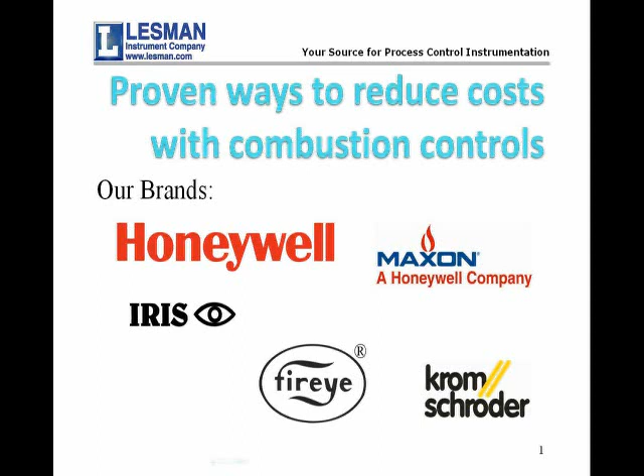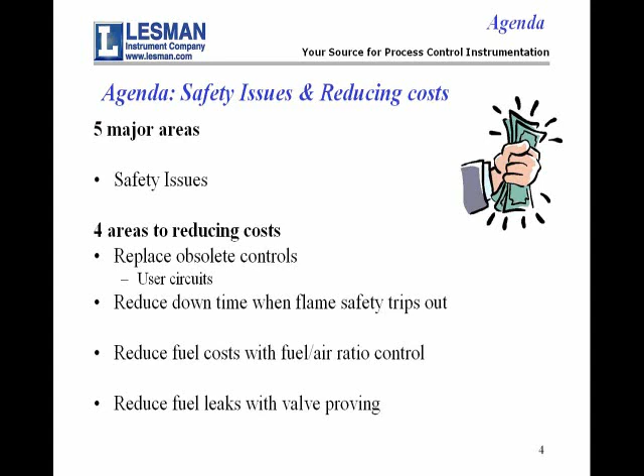The areas we're going to cover are some safety issues, because out in the field we discovered some people are unaware of basic safety issues with flame safeguard. We'll refresh them on that, then go into 4 areas where people can reduce costs. The primary one is replacing obsolete controls, how you save time, effort and money when the flame safety actually trips out, how you can reduce fuel costs by going to fuel-air ratio control, and what it means to do valve proving and how that can save you money in the long run.

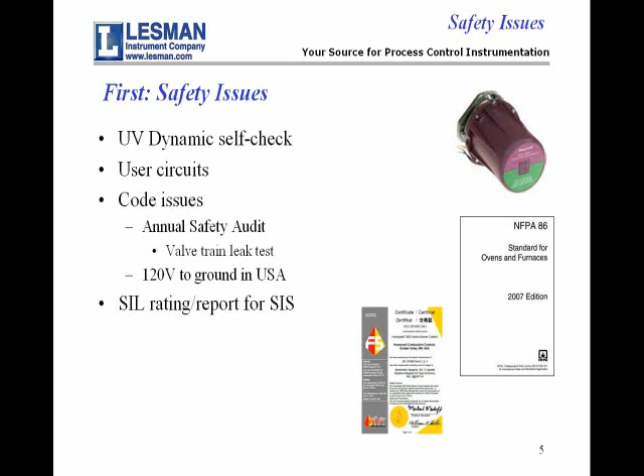On the first issue of safety, there are UV sensors called dynamic self-check. We're going to go over 3-4 slides on that. We'll touch on what happens when you have a user circuit, meaning when you combine flame safeguard stuff with other stuff out there. We'll look at a couple code issues, and finally, because some people are involved with safety instrumented systems, who has SIL ratings on this kind of equipment that can help people implement those SIS systems.

On the UV field, UV flame sensors have a tendency, when exposed to continuous flame, to either run away or burn in. This means they see a flame when there is no flame. This is contrary to what flame sensors are supposed to do, because they're supposed to detect flame when there is flame and tell you when there is no flame when it disappears. This happens when the UV sensor is exposed to continuous UV over a period of time.

The codes recognize this, and all the codes specify that if a burner is on continuously for more than 24 hours, it requires some form of self-checking in order to detect this runaway or burn-in situation so that it can be rectified.

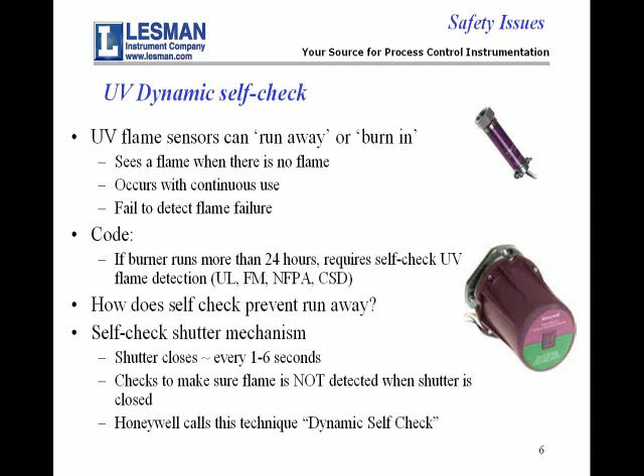So how does self-check prevent the runaway? There's actually a shutter mechanism that closes off the port and makes sure the UV sensor does not detect UV when the shutter is in place. Then the shutter opens, and you get UV back in, and the electronics take care of all this sequencing and timing. Honeywell calls this specific technique dynamic self-check.

The little sensors, called mini peepers, do not have dynamic self-check. The bigger ones, called purple peepers, do have dynamic self-check. There's an older model called the C7012, a newer model called the C7061, and a little further on we'll go through why you should probably replace the older legacy units with the newer ones because of the cost savings involved.

On the user circuit issue, we found a lot of people out there will take a standard gray box flame switch type control and add to it something like a timer to do their purge timing. We want to make them aware that the combination of those 2 devices does not necessarily make the same thing as a device designed for and sold for the purposes of doing purge timing and flame safety.

The classic example is when we went in and the design actually called for a 4-minute purge, and the operations guy said, oh, we've got the purge timer down to 15 seconds, because he was saving 3 minutes and 45 seconds. The problem is that purge times are designed to evacuate the combustion chamber, not to speed up the production process. So people should be aware that there's a liability that resides in the user when they have external circuits.

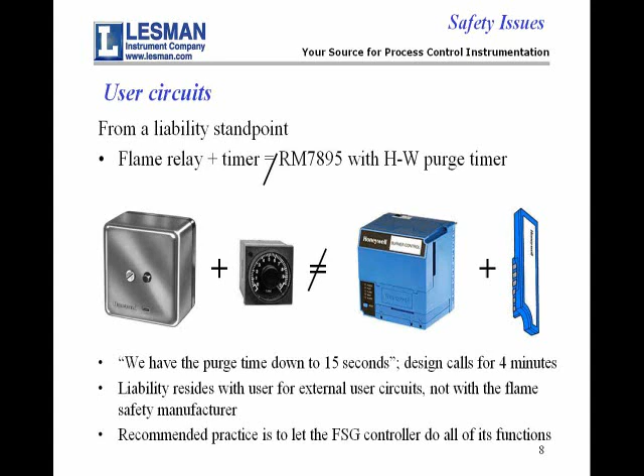But you should be aware that these standalone flame safeguard units have a purge timer built into them, so that box takes on the function of purge timing if that's what you're going to do in a smaller system that doesn't require a full-blown PLC control that you're going to dedicate for burner management. Does that answer the question? Okay, yes. Thank you.

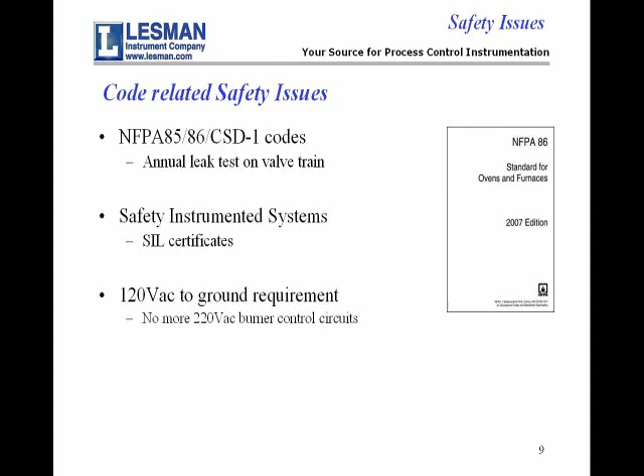On the safety-related issues, we're going to cover three things real quickly here. One is the annual leak test on the valve trains, a real brief touch on the SIL certificates that are available, and then one that we found people aren't also aware of is that the NFPA 86 actually banned the use of 220-volt controls and required the use of 120-volt controls.

On the annual safety audit, CSD1 is for smaller boilers, NFPA 85 for large boilers, and NFPA 86 is for ovens, kilns, and furnaces. All of these require an annual leak test on the fuel valve train, and we found that many facilities are just not aware of this.

What's the leak test involve? Well, on the gas train, you've got your double block and bleed valves, and you typically have a vent valve, or sometimes valve proving. But the idea behind a leak test is to make sure that the safety shutoff valves actually shut down when they're supposed to, and that when they shut down they are actually tightly closed and not leaking gas. So the test of a valve involves taking a plug out of an access port, hooking up a flexible tube to it.

You stick the flexible tube in a bucket of water, and then go through a 10-step procedure in terms of where you apply the pressure and how much pressure you apply, to count the bubbles coming up out of it.

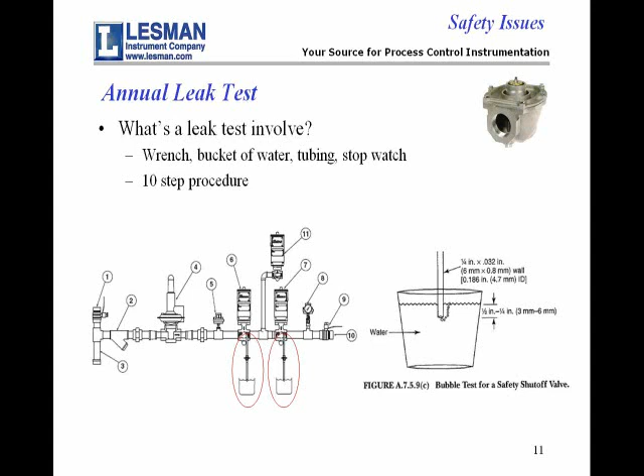In some jurisdictions, the authority having jurisdiction will come in and say this is an acceptable rate. In other places, they don't care. They just say, what's the manufacturer say, and then you go back to the manufacturer tables.

But the point is, if a safety shutoff valve doesn't seal shut, then it's not doing what it's supposed to. And this really becomes evident when we walk through places and we see some safety shutoff valves that have been installed for 25 or 30 years. You have to ask yourself, with cycling and dirt and grit over that period of time, how well are these valves actually sealing?

And that's what the annual leak test is supposed to show people: yes, the valve will actually open and it'll shut, but when it shuts, is it actually doing its job? Is it actually cutting off the fuel flow?

Excuse me, what is on that last slide, AHJ? What is AHJ? Authority having jurisdiction. In some places that's the fire marshal. In some places that's the safety department. It depends on who it is.

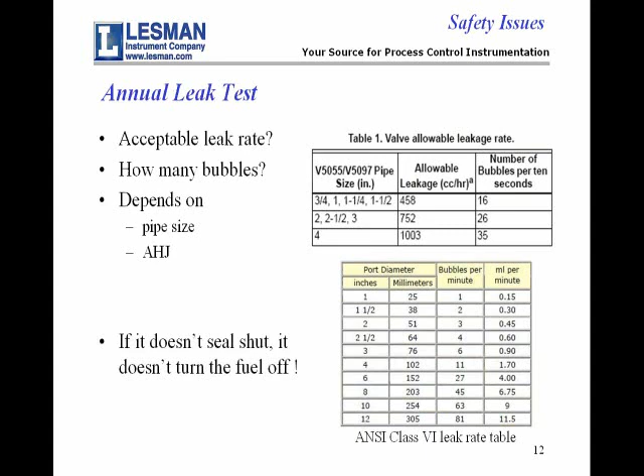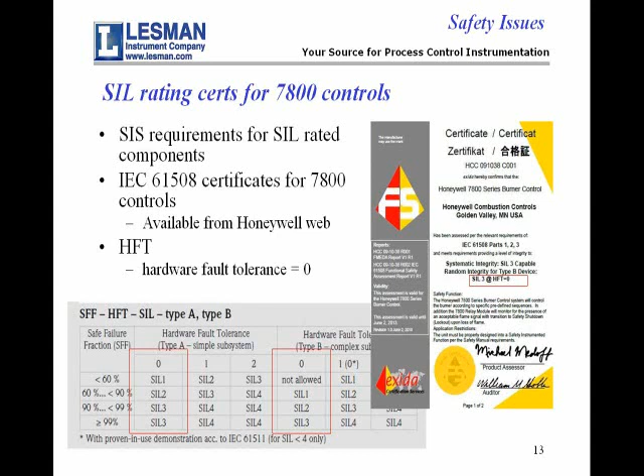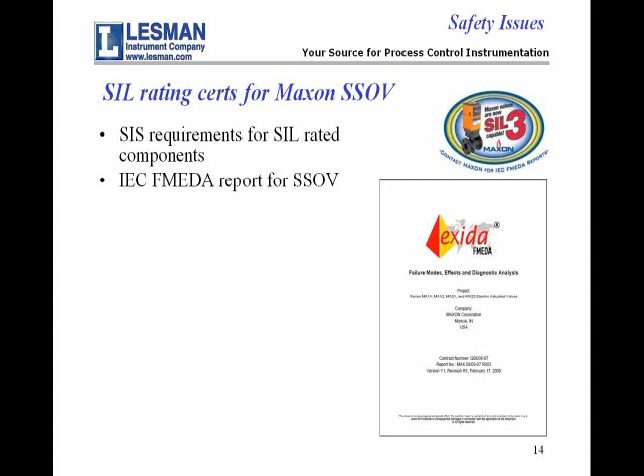Generally, this is more important to people who build their own burner management systems using sensors and PLCs than to people who just put in the blue boxes and let the blue boxes do the work. But what it involves is you have to have certificates that tell you how fault tolerant a given device is, and the certificate gives information that it has a hardware fault tolerance of 0, and people calculate that out. Maxon also has a SIL 3 rating, which they achieve through exida, an independent agency they hired to assess the lifespan of their safety shutoff valves.

The last topic here is 120-volt operation. This goes way back to the mid-90s when it became apparent that people operating with 220-volt control, where the 220 volts is like residential with a neutral in the middle, could get a false situation that can't be detected by the control, and therefore the control won't shut down.

It's only of interest to people that run in that mode. We have a document number that, if that's of interest to you, we could send out and show you.

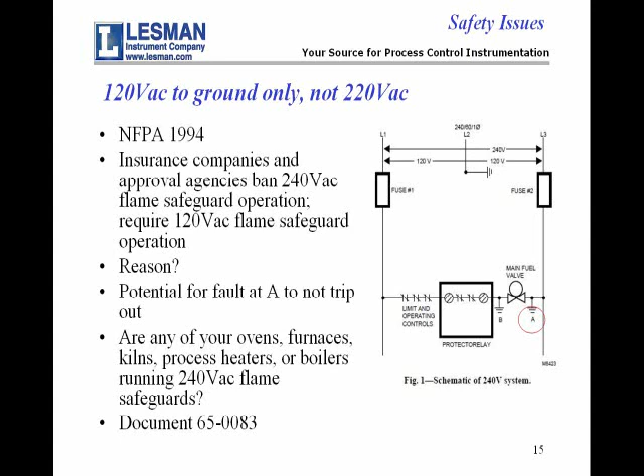What's happened over time, though, is that since this is almost 15 years later, U.S. companies have not been selling 220-volt controls for 15 years now. So this only comes up really in a replacement situation, where if people have this, they should be aware that...

Now I'd like to cover 4 major areas where we see that people can actually save money working with controls. The first one we're going to cover is replacing obsolete controls.

There's a lot of these gray boxes out there. In fact, a lot of people can look at that gray box and say, oh, that's an RA890, because it's been around for 50, 60 years now, and people just know them by their part number.

What this slide shows is the comparison of costs for just replacing an existing gray box as opposed to replacing it with a newer microprocessor-controlled blue box. The RA890 is still available out there because there are literally millions of them still in service, and you can buy one for $1,500. On the other hand, you can replace it with an RM7895A for about $650.

It requires the flame amplifier module that plugs in there, for about $250. If you're going to do it, you have to actually, in this case, put a new sub-base on there because the wiring for the blue boxes is different than the wiring for the gray boxes, and you need the purge timer. So you total all that up, and it comes to a little less than $1,000.

Well, the $1,000 in comparison to the $1,500 price is 2/3 the price by going to the new one versus the old one. So people say, well, what do I get if I actually go to a blue box?

Well, the first thing you get is you get a lot more information displayed for you. The gray box over here just has a light on it that tells you it has power. The blue box has the series of LEDs down here that tell you where it is in the firing sequence.

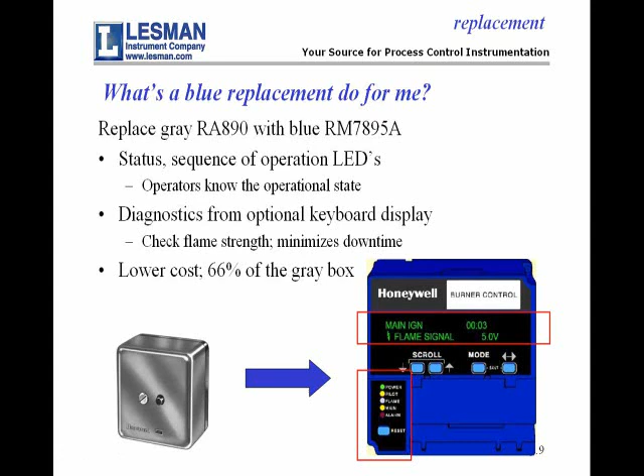And if you put the optional display on it, it has all sorts of other information up there which can be valuable over time, like what the flame strength signal is. There's numerous diagnostics also available out of that display. So you get more information right off the bat, plus you also get the lower cost, about 2/3.

Now there's actually a second alternative here. The original one I put up there was called the core control, and those core blue boxes have been out for the last 25, 27 years. In that period, they've made enhancements to them, so they have enhanced versions.

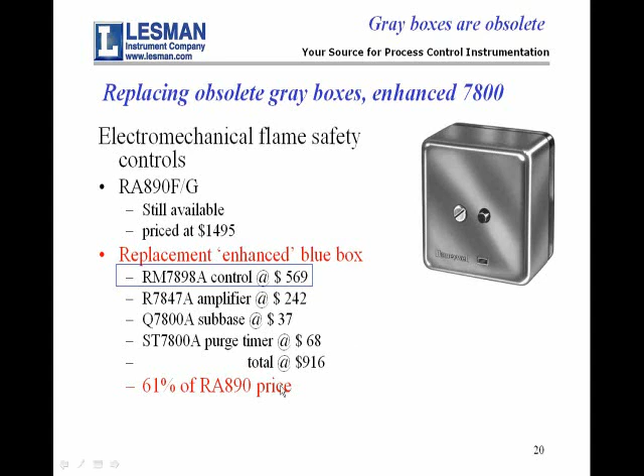If we compare the enhanced version control to the old gray one, we still have the price of $1,500 to replace the gray box. Now we're down to about $570 for the replacement blue box. And if you look at the bottom here, we're down to 61% of the replacement cost of just going back with the old style gray one.

So I've summarized that here. You can replace it with one of 2 blue boxes. One is 2/3 the cost, and one is 61% of the cost of the other one.

This slide goes over what the enhanced models offer over the core models. These are the enhancements that have been put into the blue boxes over the last 20 years, so you get what they would generally term, in marketing terms, the latest and the greatest.

One of these is the ability to have these new enhanced boxes do valve proving. I'm going to go over valve proving in a couple other slides to show you actually what the sequence is. There are fewer of these enhanced models than there are core models.

So if you have multiple burner control systems out there, you can probably do with 2 or 3 spares instead of 7 to 10 spares for controls out there, because one control of the enhanced version covers probably 3 or 4 models of the older legacy units.

There is a run test switch on the top of these blue boxes, which people use for pilot turn-down tests on interrupted pilots. Before, you had to buy a specific model for that with the old legacy ones, but all of the enhanced models come out with that run test switch on it.

People have found over time with the diagnostics on these that although FM considers these boxes good for 100,000 cycles, they'll typically run somewhere between 200,000 and 300,000 cycles. So the new models give you a 1 million cycle counter on them, as opposed to the old legacy core units that only have a 100,000 counter in them.

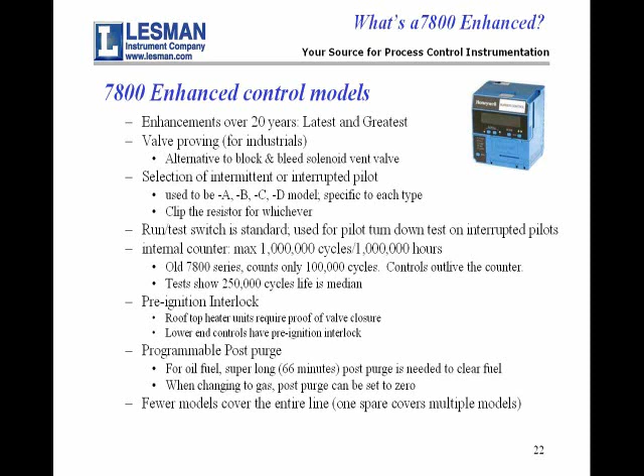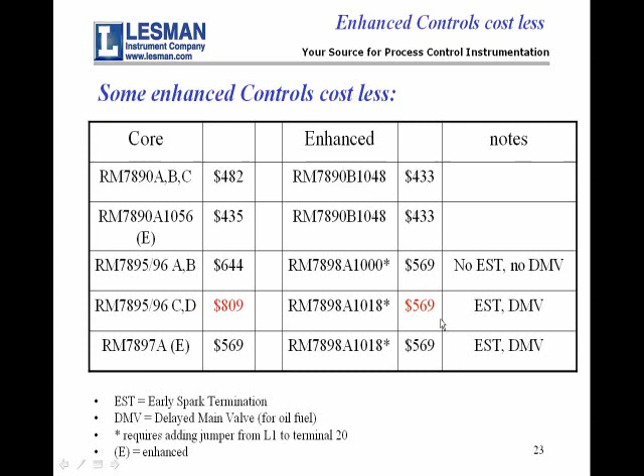Here's actually a price comparison page that shows you, on the left-hand side, the core units and then their enhanced replacements. Some of them can be only a $2 difference, but some of them can be a $250 difference. We have a chart for that - I'll pop through it in a minute here.

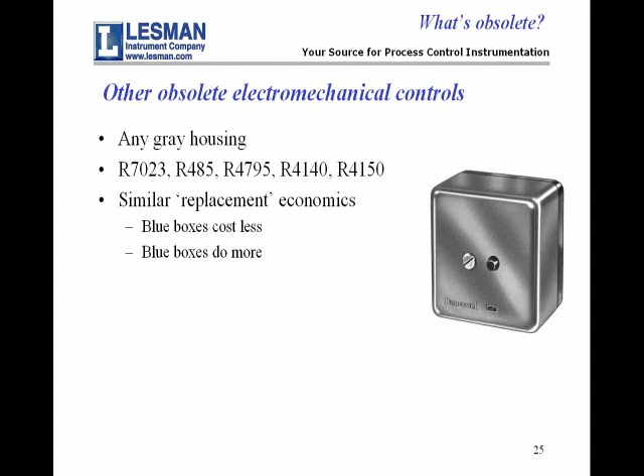There are other obsolete controls out there. Anything in a gray housing from Honeywell is an obsolete control. I've listed off the model numbers there, but just be aware that some of these are still available, some aren't. The R4140 has been obsolete for 17 years now and isn't available even as a replacement control. One has to go to a microprocessor unit in order to replace it.

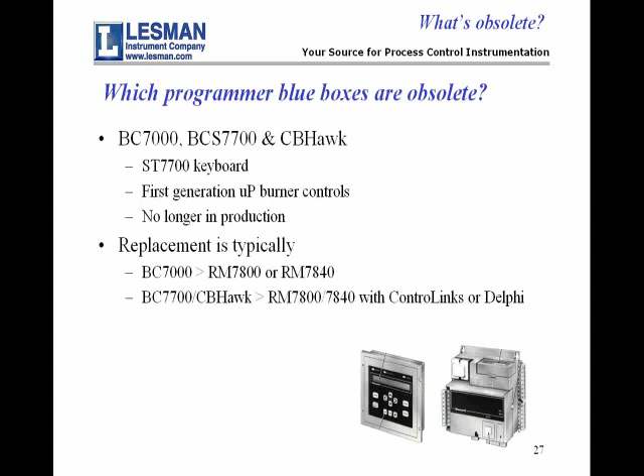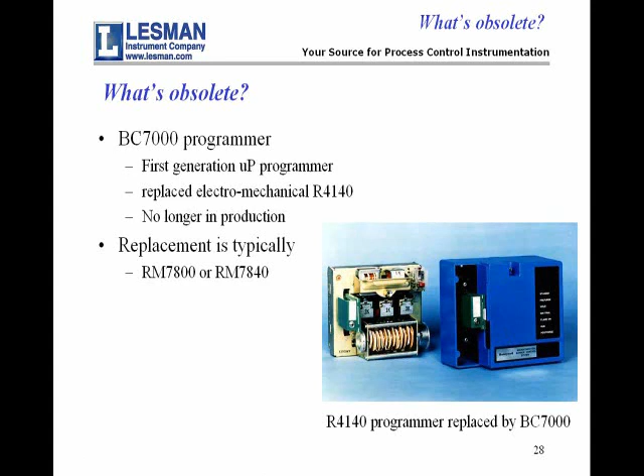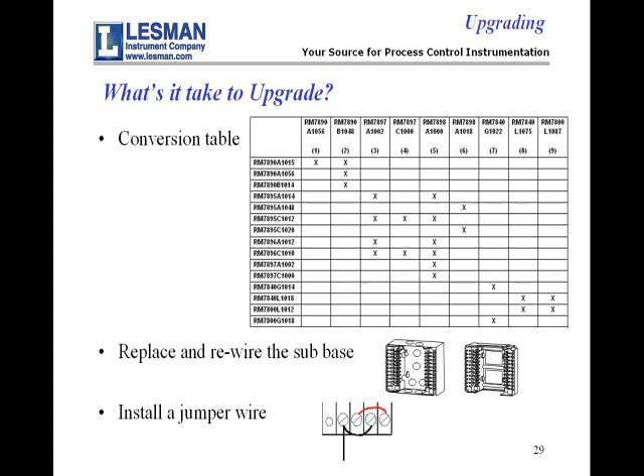In order to upgrade, we recommend that people replace and rewire the subbase, just because a lot of these controls, by the time they wear out, are 15 years old, and it's often worthwhile to replace the subbase because it's a plug-in unit, and you want to make sure you have good spring contacts so you don't get nuisance trips from bad contacts on the subbase. Some of them require a jumper wire, but there's an instruction sheet that comes with it telling you whether or not you need one.

What I find in talking to people about upgrades is that the natural tendency is to wait until the old control fails, and then it becomes a crisis. In the crisis of having the unit shut down and not operating, the idea is to get it fixed as quickly as possible, and it's just easier to get the old part number than it is to figure out what the new part number is and go through any changes.

So the real obstacle I find to upgrading and really taking advantage of saving a third on this kind of stuff is that you actually have to plan ahead and say, okay, if we've got this, what are we going to replace it with when we get to that point, and then plan for it so you've got the stuff all lined up and ready to go, or even do it beforehand before you actually have a catastrophic failure.

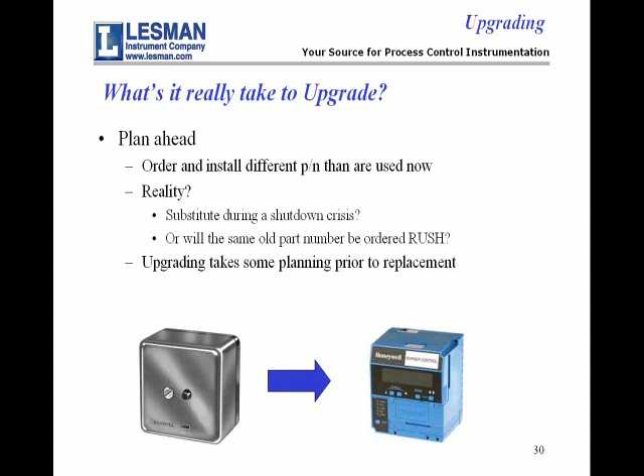There's an issue about rebuilt controls. There are outfits that sell rebuilt controls, and if you go on the web, you can find places that sell rebuilt Honeywell Flame Safeguard controls. The issue with those is both safety and liability. There are absolutely no guarantees on the rebuilt controls. They probably are functional when they come out of the box, or otherwise the rebuilder wouldn't stay in business, but you have no idea about the quality of the components they use to actually rebuild the controls. The bigger issue in my mind is actually the liability.

When any of the original vendors, whoever it is, FireEye, Iris, Honeywell, sells you a control, the liability for the function of that control is on them. When a rebuilder opens the box and changes anything in there, the liability transfers to the rebuilder. These people can typically be garage shop operations that literally say, well, it didn't work, so sue me, what are you going to get?

And when we're looking at where flame safeguards go, that's probably not a wise or prudent trade-off, to try and shift liability onto somebody that doesn't use factory OEM parts, has quality that could be anywhere on the spectrum, and frankly doesn't have any assets if in fact it proves out that their rebuild doesn't work the way that it should.

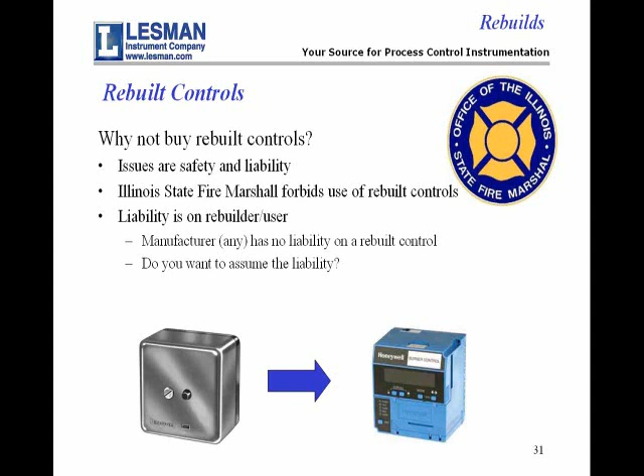There's another issue on upgrading, and that's these purple Peeper units. The original one out there was the C7012, and this is an enormous savings here because you get better performance at literally half the cost when upgrading from a C7012.

The original 7012 actually had the electronics built into it. When you mount these things on the burner, they tend to be close to the burner, so they take all the heat, and heat is what kills electronics. On the replacement unit, which is the C7061, the electronics are taken out of the purple Peeper itself and are moved to the blue box, which is typically in a control panel somewhere, in an environment at a much lower temperature than it is 2 feet off the burner. So typically the electronics last forever when they're in the blue box, as opposed to decaying and degrading when they're right next to the UV tube in the purple box.

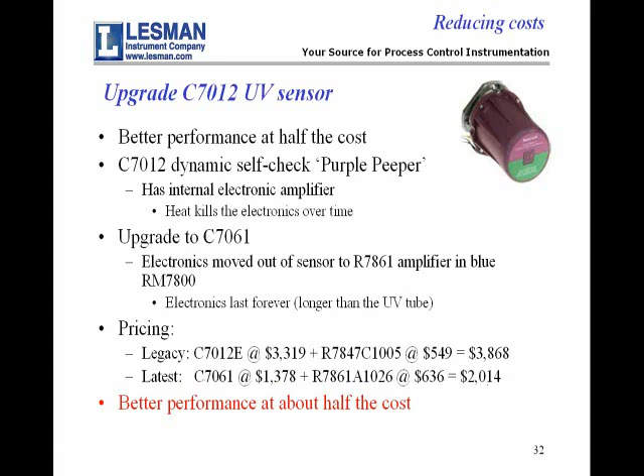But here's the big price issue. The legacy unit, by the time you put it all together, it's a $3,900 purchase. And if you replace it with a C7061 and you have to put the card and the controller for it, you're down to about a $2,000 cost. That's better performance at about half the cost. This is something everybody should be aware of, because there's no reason to pay twice for the same performance where the electronics get burned up over time because they're close to the burner.

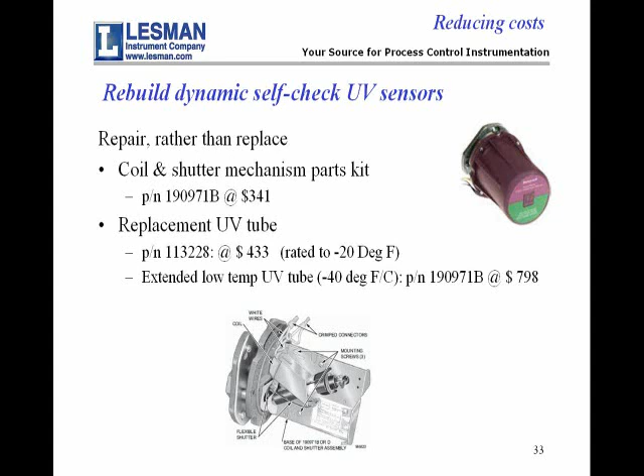If you want to, you can rebuild these purple Peepers. Honeywell sells kits that are the coil and shutter mechanisms or the replacement UV tubes. It's the kind of thing you want to take out of service, put it on the workbench, disassemble it, put it back together. It's typically best done there. You don't want to have a guy standing up on a scaffold to do it. But the parts are available, you can see their part number and pricing there. And we sell kits all the time to people that do this, and it can really renew a unit.

The next topic that we wanted to cover is how you can reduce downtime when a flame safety actually trips out. The biggest thing in doing this is diagnostics, because when you get a trip on a unit, the question is, where do I go to fix this? Rather than just hitting the start button and hoping that it'll restart, what's the real problem so that we can fix it and get rid of this situation, particularly nuisance trips?

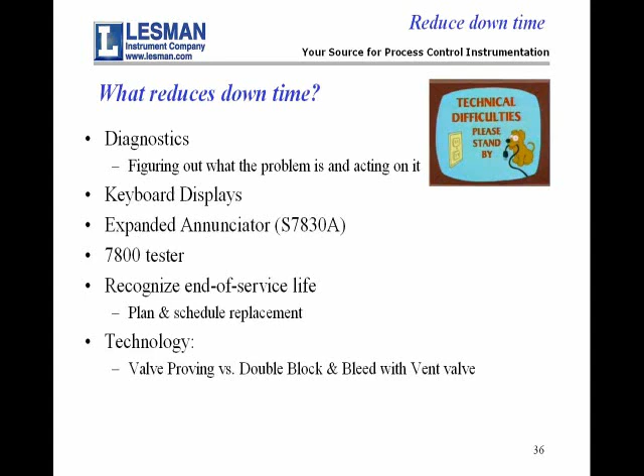To get diagnostics, there's a series of things out there for you. The biggest one is keyboard displays. You've got an expanded annunciator. There's actually a standalone test unit to test the primary control itself. We'd like people to recognize that there is an end-of-service life on these things. They don't last forever, even though they tend to function for a very long period of time. And in some cases, there's an alternative technology you can upgrade to that can actually reduce your downtime because inherently it has less problem with it.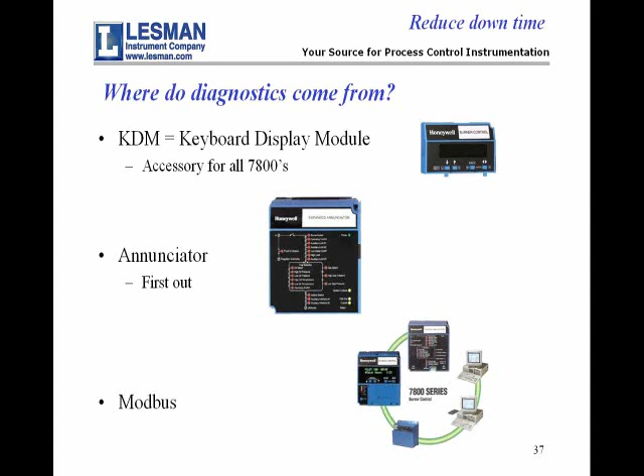On the keyboard displays, they're the little box up here that plugs into the 7800 blue box control. The annunciator's got a whole bunch of LEDs on it that show you what's happening. And Modbus is used by a lot of people that have multi-burner systems because it gives them diagnostic information rapidly in a central point so they can analyze it before they send a technician out to troubleshoot what the fault is.

The keyboard displays are optional on all these Honeywell controls. When you buy the basic unit, it comes with just a blank cover on it. For the keyboard display, you pull the cover off, plug the keyboard display in, so you get the blind one plus the optional display, and you get full diagnostics. There's a key here many people aren't aware of: all the diagnostic information is actually in the standard unit.

The keyboard display is just a means of looking at it. If you've got units out there that are blind right now, you take a keyboard display, pop the blind cover off, put the keyboard display on there, and it's like a moving service tool. You can pop it on an existing unit and see exactly the same information you would see if you'd had a display on there from day one. So the optional display module is as much a service tool as it is something you can leave clipped in at all times.

When you push the buttons on it to look at the diagnostic information, you get the last 6 lockouts. By nature, it gives you the lockout in terms of the first out annunciation - what tripped first to force the control into lockout. There's a history on there, and it also gives you the existing state at the moment you go into it for the various interlock terminals, the purge timing, and the relay type.

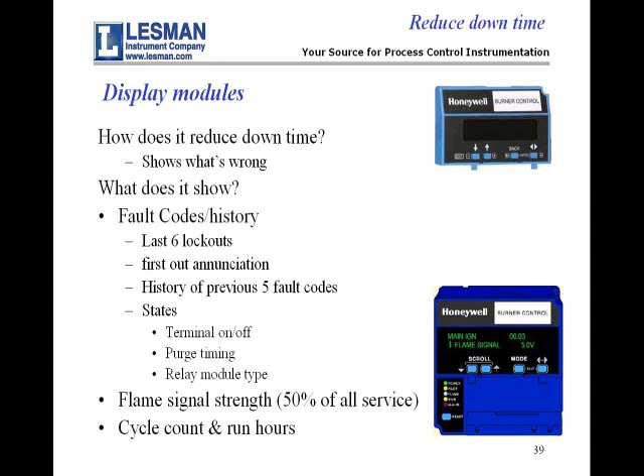The one that people use all the time is the flame signal strength, because that's typically - like on automobiles, it usually isn't the brain that goes out, it's the sensor that feeds the brain that's the problem on the engine. Same deal with combustion controls. Probably 50% of all problems are bad connections. Probably 40% of the remaining problems are the flame sensor, particularly if it's flame rectification with flame rods. That's the core problem.

Quick question on those - you said you can pop that unit in and out. Can you do that while it's in operation? Sure, yes, without question. And then the next question - are these units able to be put on a network so you can read the information somewhere else? Yeah, exactly - we've got a slide coming up about 2 ahead. That's exactly where the Modbus information comes out of, yes.

The expanded annunciator is used on bigger systems where you have lots and lots of interlocks - one of those things where, depending on how the plant works, it's sometimes easier for somebody responding to a trip situation to just look at the annunciator and see what the first out unit or first out device was, and troubleshoot from that rather than going through the keyboard display. What happens with the annunciator is that the interlocks are wired directly to it, and the annunciator has a serial link to the blue box controller. All the control is still done in the blue box, but they communicate back and forth about what's happening with the interlocks wired directly into the annunciator.

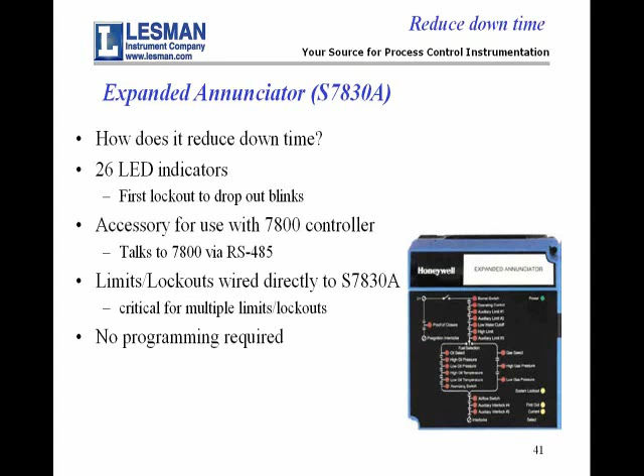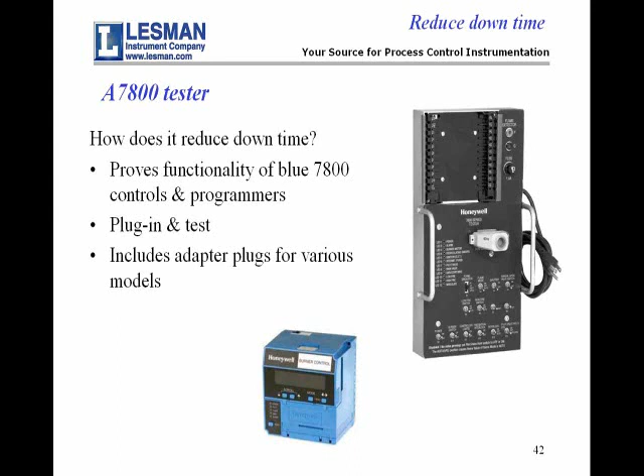The A7800 is a tester that's a standalone unit, plugs into AC power. Because there's a universal base on it, any of the 7800 blue boxes will plug into it. There's also a little white test adapter selected for the given model that's plugged into it, and with all the various switches, you can simulate interlock conditions to test and make sure the 7800 box is actually functional. Given that these are anywhere from $800 to $2,000 boxes, sometimes it pays to know whether you actually have a functional blue box, or whether the problem could be elsewhere in the system.

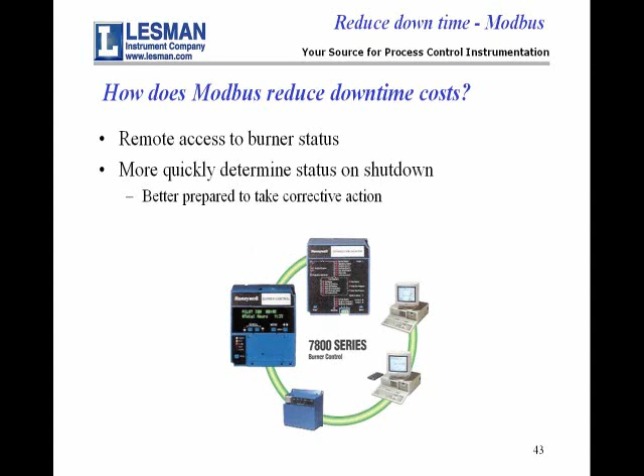The next couple slides here will cover Modbus and how it reduces downtime. Where we've seen people use Modbus is particularly multi-burner applications where it gives them remote access to these burners in one central place. So if they've got a trip, it tells them which burner is out, and gives them some history on that burner, so that rather than having to send somebody out to investigate, the technician can go out pre-armed with some information, and in many cases pre-armed with enough information to actually fix the problem, rather than just going out to try and discover what the problem is.

Modbus is a widely used digital communications protocol. It actually resides, as you asked before, inside this module that pops on there. The serial hardware is in here. And again, the diagnostic information is all in the blue box itself, but it's this display that pulls it out, puts it on Modbus, which can then be read out by an HMI system.

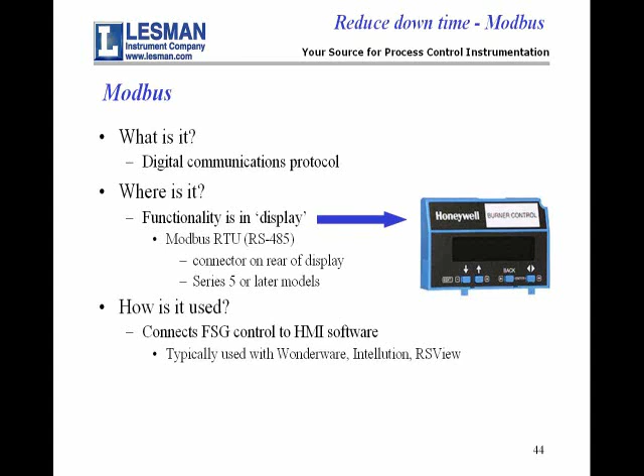We find that people typically use Wonderware, Intellution, RSView, whatever it is that you've got around, as an HMI system for pulling this information and then organizing it and displaying it for people that want to take a look at it.

Modbus is really a diagnostic... So I need to get the blue box and the little diagnostic display to connect it to Modbus, correct? Correct, because the diagnostic information is actually in the blue box itself. The blue box is doing the controlling and the diagnostics. But the only way to get it out... Right, the display actually has the Modbus output on it. Correct.

There are several different versions of the display. One version is a Modbus-only module. And then there is also the unit that has the display and the Modbus on there. So if you just want Modbus out of a blue box, you can get it. All right, thank you.

The kind of information that comes out of Modbus is literally exactly the same stuff that you see when you punch the keys on the diagnostic display. It's flame strength signal, first out annunciation, fault code numbers. And in fact, there's probably twice the amount of information available by Modbus, because there's also things like what version the controller is, which might or might not come up on the display, but it's actually available by Modbus. It isn't stuff that people typically look at. What people typically look at is the stuff that's up here, because that's what helps them in immediate troubleshooting of a fault.

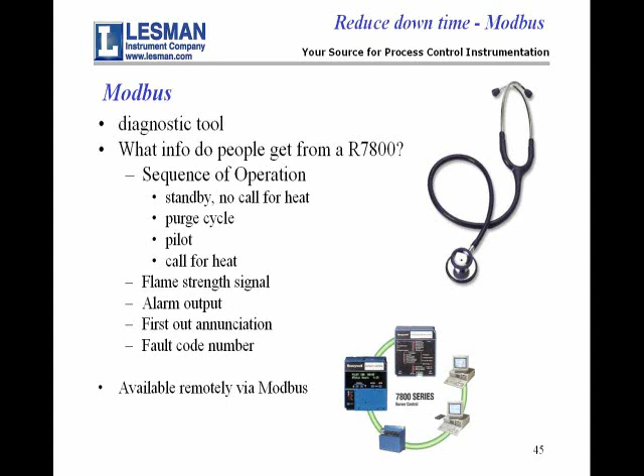Now, there are people out there that use PLCs as their burner management system. And I'd just like to clarify that I don't think anybody uses Modbus from a 7800 to make a shutdown operation on. If they're using a PLC as their burner management system, then you probably don't have these blue boxes, these 7800s, down here, because the PLC is taking the place of those.

There are other people that run PLCs for just ordinary process control, but they want to know what's happening with the burn with the 7800s. And they're the ones that take the information and monitor with it. And just to be clear here, if you've invested in the cost of a 7800, you want to leave the burner management control to the blue box 7800, because that's what it was designed to do. And then you want the PLC to monitor that and grab the status off of it so that you can shoot the information off to an HMI somewhere, and/or take other control steps based upon whether or not you've got burner operation.

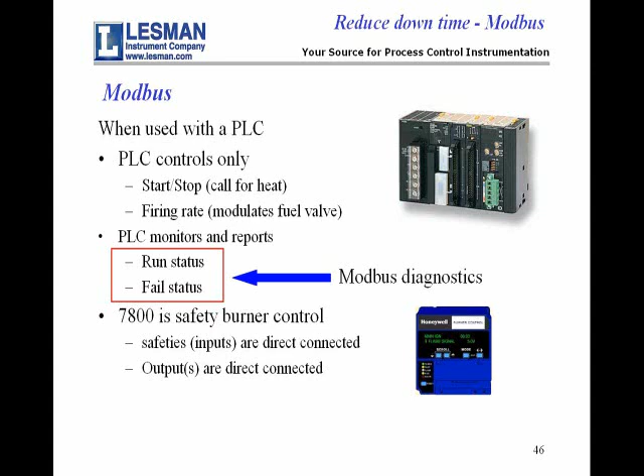But you really want to leave the burner control in the blue box, because that's what they do really well. The problem of putting burner management into a PLC is that generally you have to lock that PLC down so that it can't be changed, because of the inherent liability of doing burner management control on a PLC. It then becomes a safety PLC as opposed to a generic purpose PLC. Was that clear? Yes. Good. Go on. Thank you.

Just to cover operational lifespan, again, we go out where we see some of these safety shutoff valves that are probably 35 years old, and they're still in service, and unfortunately a lot of these people have never done a leak test on them either. People should just be aware that all stuff that's designed has some inherent design life in it. Some of this is coming out now because of the safety instrumented systems that are being implemented. They actually have to do these analyses to find out how long a device can operate before it's considered at the end of its useful life.

Well, there are several end-of-life indicators out there. One of those is when you know what the design life is on something, you can go look at the date code and a serial number and determine whether or not it's past its end of life.

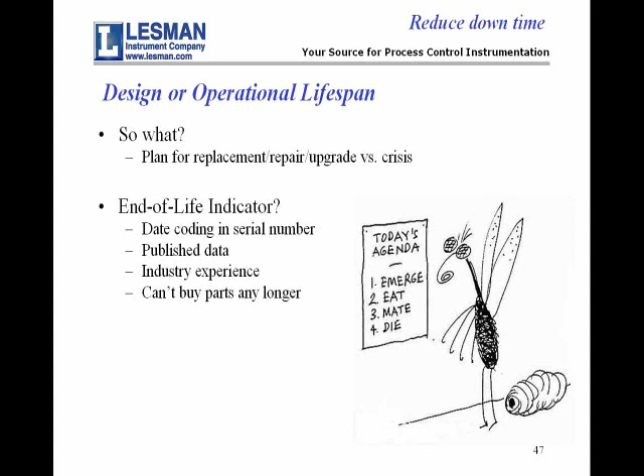Sometimes there's published data that says it's good for a certain period of time. In other cases, it's industry experience - we know we get 10 years out of this, or 5 years out of that, or 12 years out of something else. The other thing is if you can't buy parts for something any longer, that's probably a really good indication that it's at the end of its useful life.

Maxon, who makes safety shutoff valves, actually hired Exida to make this report, and the Exida report says these safety shutoff valves have a 10 to 15-year lifespan. The indicator of end of life is a combination of what the leak test shows you and what the serial number shows you, because the serial number can be decoded to tell you when the valve was manufactured. For example, 98M means the valve was built in 1998 and it was a manual valve, and there are other codes for the other parts of the serial number.

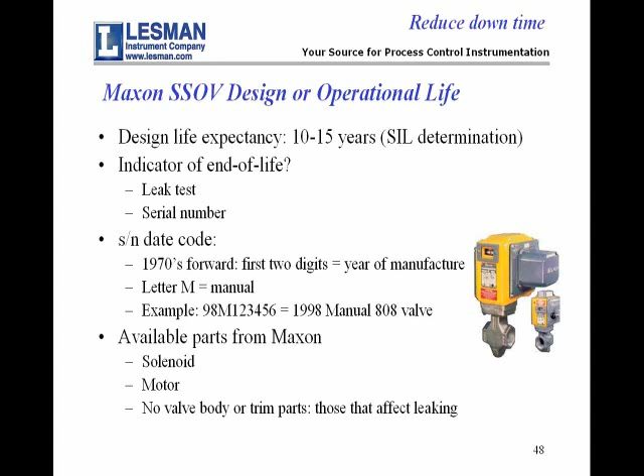Now, these Maxon valves can be repaired - you can put a solenoid in them, you can put an actuator motor in them. However, they don't sell the valve trim parts, because they can't trust people to actually put it back together and get it tight. When they test these valves at the factory, they test them to ANSI Class 6 levels, which is quite a tight valve. Their experience tells them that when you sell people a repair kit in the field, you can't really rely on them to put it all together and have it actually be tight enough to do what the valve is designed to do in service, which is to be a safety shut-off valve and cut off all your fuel.

The Exida report they issued is up on their website, and the next page shows, in the red rectangle, that based on general field failure data, a useful life period of approximately 10 to 15 years is expected for this series of electric actuated valves and actuators. So that gives you some idea of what you can expect out of the safety shutoff valves on your gas trains out there.

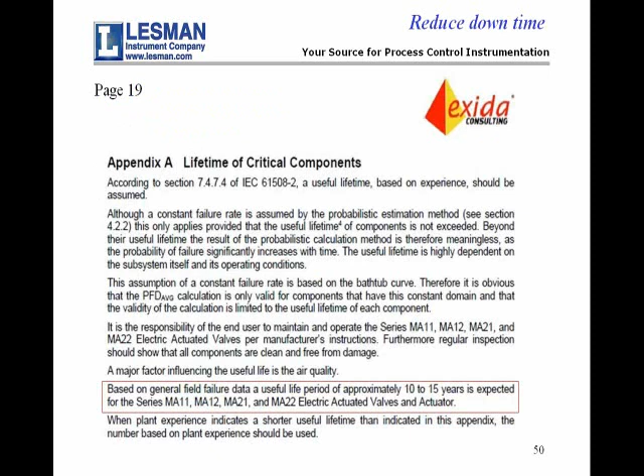Honeywell can tell you for their UV units that they have an 8-year lifespan, or a 40,000 hour ability to look at continuous luminosity. The 8 years, interestingly enough, is 8 years of luminosity or 8 years of shelf life - the tube in a UV sensor actually degrades over time. What that means is somebody who bought a spare and put it on the shelf for 3 years really only has about a 5-year lifespan left on the unit when they put it into service, because sitting there on the shelf, it lost approximately 30% of its lifespan just sitting on the shelf.

By the way, you've got to be real suspect of commercial rebuilds on UV tubes. People have told me we've had customers come back and say, 'We tried one and it only lasted 3 months, so we're coming back to get the genuine OEM parts and rebuild our own rather than buying a rebuild unit.'

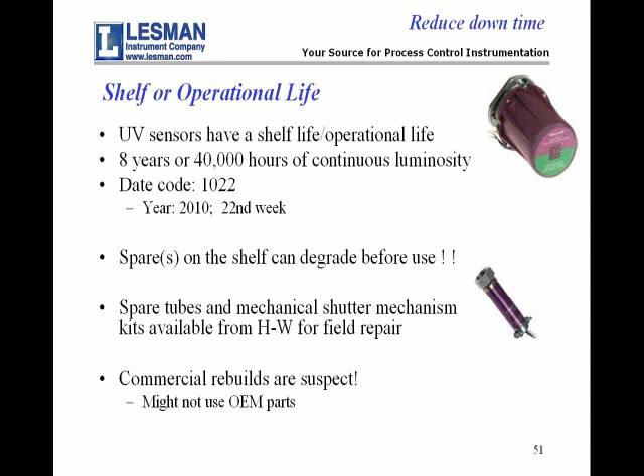On these purple Peeper UV tubes, if you've got a box on the shelf, the date code is directly underneath the barcode. It might or might not be on a unit in the field, because it's an adhesive tag on the side of the purple Peeper that mounts up against the burner. You'd almost have to look at it with a mirror, because this threaded port is actually where the sight tube screws into, and that mounted sight tube goes into the burner sight port.

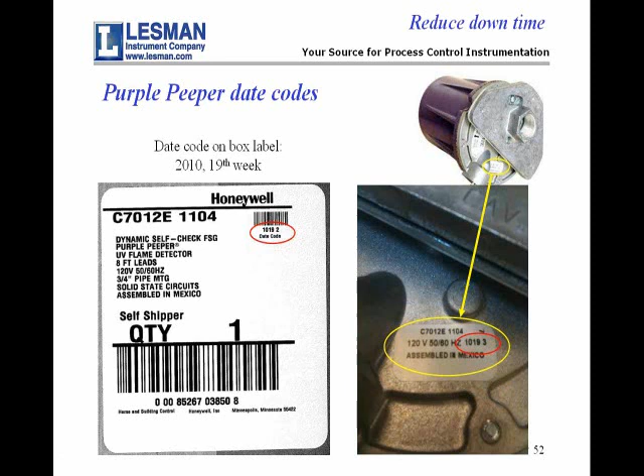That tag has the same date code as the box tag, but whether or not the tag's still there after an installation period is probably iffy. On the smaller mini Peepers, the boxes for stock products have the same date code, but the adhesive tag on the mini Peepers is a much bigger tag, wrapping 2/3 of the way around. Most of the ones we've seen installed still have that on there - the adhesive is really good and tends to stay on over a period of time.

So the way to decode that is that the first 2 digits are the year, and the next 2 digits are the week. So this 1019 would decode to 2010, 19th week.

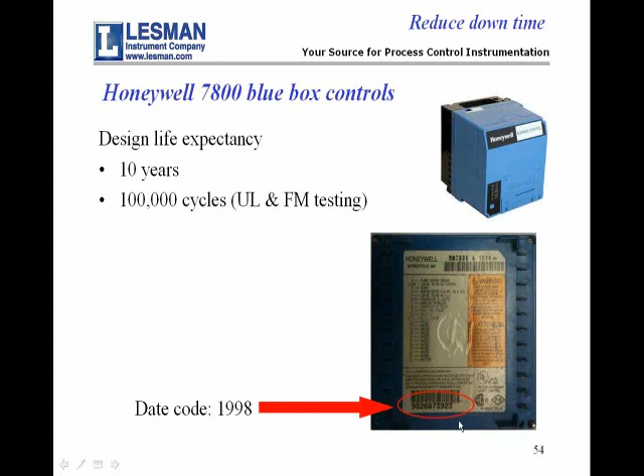On the 7800 controls, they have a 10-year expected lifespan or 100,000 cycles. You've got to pull the unit out. What we're looking at here is the wire terminals. When you flip the unit over, that's the tag on the bottom, and underneath the barcode there's a date code. It decodes the same way: 1998 for the 98 underneath the barcode.

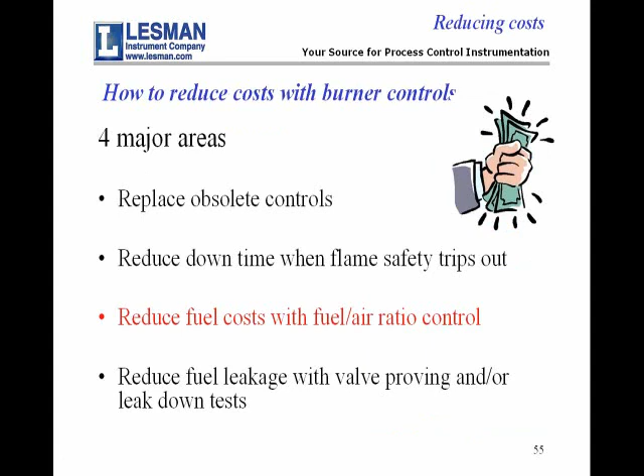The third way we wanted to talk about saving money was actually looking at air-fuel or fuel-air ratio control. The way most boilers are done is that they have a jack shaft, which is a mechanical linkage between the combustion air and the fuel.

Some of the more sophisticated ones have what technicians call an Indian head ratio cam, which adjusts the combustion air to the fuel demand valve by characterizing the combustion air response to the fuel-air demand position at any given point. The problem with these is that you can easily get any ratio at any point along the curve to be off by 2 or 3%.

You've got mechanical slop in there, and in reality, when these things are commissioned or tuned, because of the time it takes to do 8 or 12 stops along the curve, a lot of technicians will only do 2 or 3 — the bottom point, the top point, the midpoint — and skip everything in between, so you're left at whatever they were at the last point, which might be 3% or 5% off. It's hard to tell if they don't even test it.

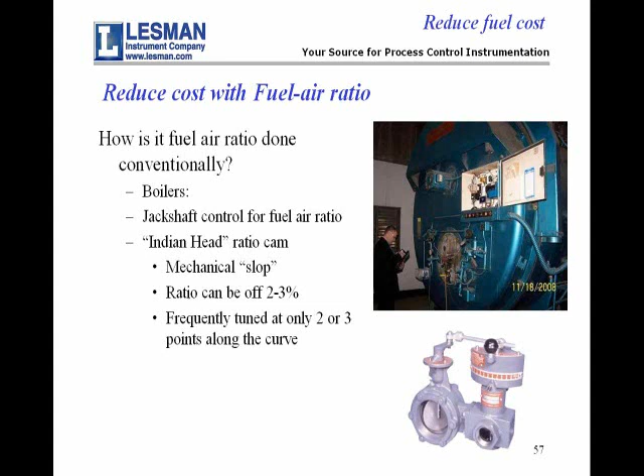Honeywell came out with a product called ControLinks that does fuel-air ratio control and eliminates the jack shaft, using what they call parallel positioning. This amounts to putting an electric actuator on the fuel control valve and a separate actuator on the combustion air. By characterizing these two control actuators and hence the control valve response, you get a much higher turndown ratio, which enables you to run much longer at low fire.

This becomes particularly evident because in many cases boilers are oversized to start with, and if they're modulating boilers, they want to run at the lower range anyhow. It gives you much better control at this lower range because you have much better fuel-air ratio control there, rather than just the Indian head control or the mechanical linkage control.

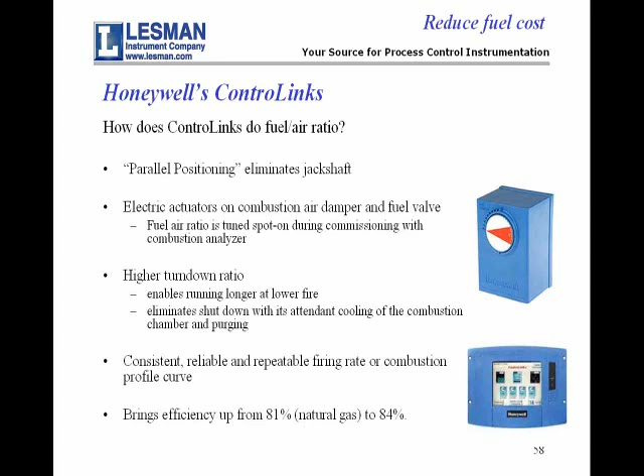We've seen people actually increase their efficiencies from approximately 80% up to 84% — a 3% improvement continuously on these devices — which is the payoff that gives you the justification to go ahead with a project like this.

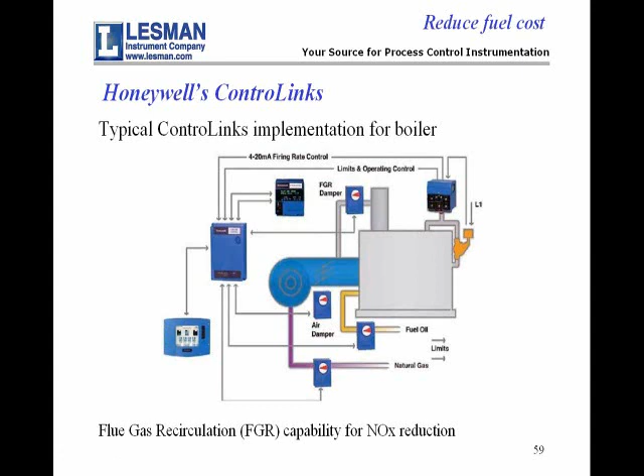Here's a typical diagram where it puts in. It still uses the demand controller. It can be retrofit onto devices that have flue gas recirculation, as shown here. There's an optional display panel for operators to look at the sequencing and operation, but that's optional — it doesn't have to be there. You can run it through the blind box if necessary.

Typical paybacks on ControLinks are 6 months or less. It can be retrofit on boilers anywhere from 75 horsepower to 600 horsepower, and they've gone up to 1,500 horsepower. There are some limitations here.

We want to look at applications. We've got to make sure that these actuators can actually drive, that they have the torque necessary to drive the control valves. We can test them with a torque wrench if necessary. We have one company that actually replaced an air damper with a newer version in order to put the system on, and they found it cost effective to do so. I think they had an 8-month payback instead of a 6-month payback because of that, but it was well within their justification to do that.

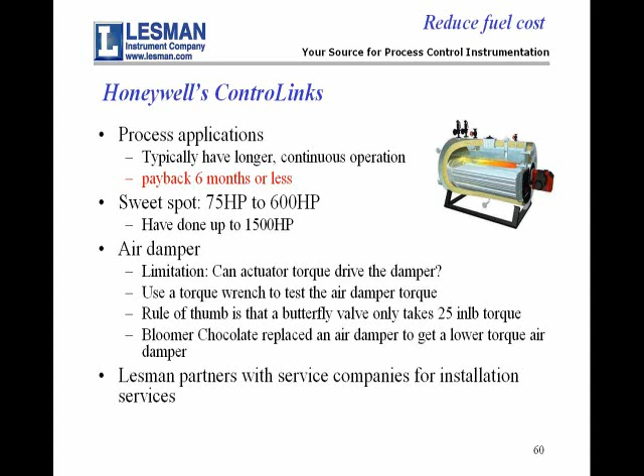Typically when we do this, we partner with a service company because it really needs a boiler service company to go in and set it up and make sure it's tuned properly at the end in order to get the full benefits of the system.

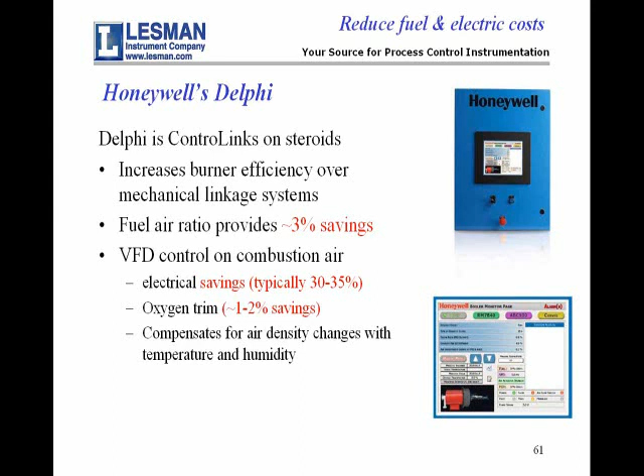Honeywell has a second system called Delphi, which is ControLinks on steroids. Across the board, they can give you the 3% fuel-air ratio savings that ControLinks can, but you can get even bigger savings because they go to a variable speed drive on the combustion air. By the time you're talking 50 horsepower blower motors, running these at variable speed instead of full out, the electrical cost savings can be significant. They can also do oxygen trim depending upon whether or not it's warranted, and that can sometimes give you 1 to 2% savings in addition to the fuel-air ratio or the electrical savings on the combustion air.

Could I ask a question on the VFDs with the Honeywell product? Who do they partner with as far as the VFD goes? The Honeywell division that sells these private labels a VFD, so they call it a Honeywell. I don't know what the name is off the top of my head. I can find out if it's important to you. Just curious, is it with ABB? Is it an ABB VFD? It is not an ABB. No. Okay, it's somebody else's unit out there.

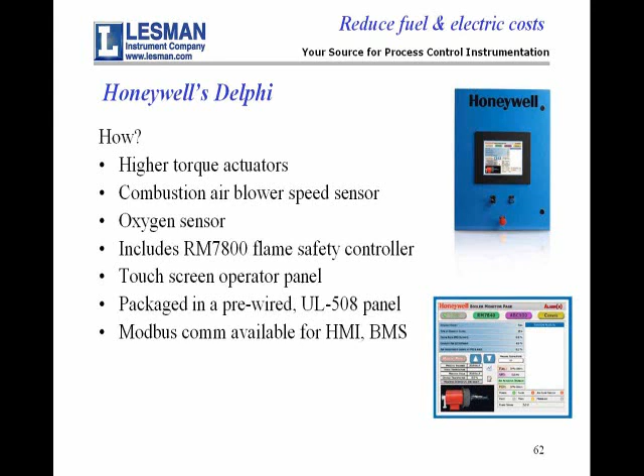Okay, thanks. Now, the big distinction, again, between the smaller system, the ControLinks, and Delphi is that Delphi also uses much higher torque actuators, which allows it to go onto systems that just require higher torque to drive valves.

Maxon also offers a fuel-air control system, but this is up at the level where they're actually doing fuel and air metering systems by putting mass flow meters in the fuel and in the combustion air lines to get true trim across the entire firing rate range. Obviously this is a more costly system, but it probably gives better payback because now you're trimming out probably to the first decimal point of airflow and fuel flow, as opposed to the assumed points that you're getting out of the other systems.

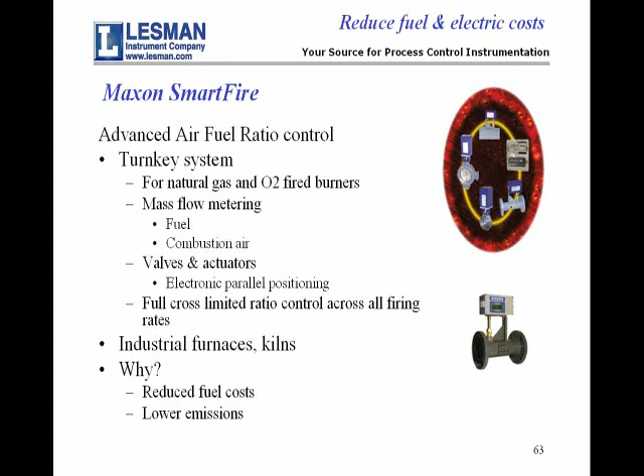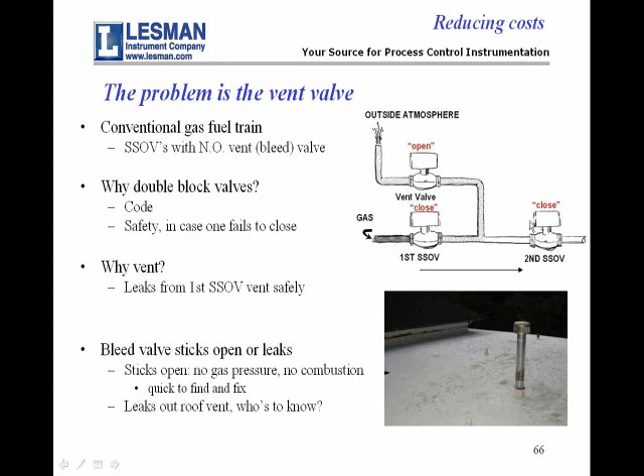The problem with this is that vent valve can either stick open or leak. If it sticks open, when you go to call for heat, you're just going to blow your gas out the vent valve, and you won't have enough pressure to actually operate the burner. So that's a quick situation to find and rectify. The bigger problem is if this vent valve leaks, who's going to know it? Because the vent's up on the roof, you can't smell leak gas up there. It's usually in such small quantities, but the problem is it can leak for hour after hour after hour. When you think the valve is shut and you're paying for gas, it's actually blowing out the roof vent up there.

People can say, well, how big a problem is this really? How common is it? Well, Honeywell actually audited a major manufacturer that had 70 burner trains, and 7 out of the 70 burner trains had solenoid valves that leaked. So the meter just keeps going round and round on these 70 burner trains, and they're pumping gas out the roof vent up there.

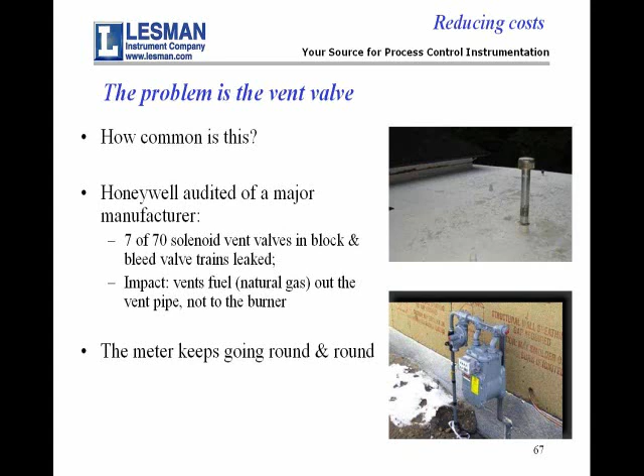If you look at, particularly if you're considering new installations, you ought to be aware of the fact that if you're getting a system that has block and bleed with the vent on it, here are the costs you incur. You've got 30 feet of vent pipe, which is a ballpark $3,000 installation. The codes define the size of the pipe that has to go up there, and you also have a roof penetration, which is a potential leak. You've got to add to the cost of the vent pipe a $200 solenoid, and then you have both of these potential failures: either the solenoid coil can fail in the wrong position, or you can get the valve to leak. So there's an initial cost to it.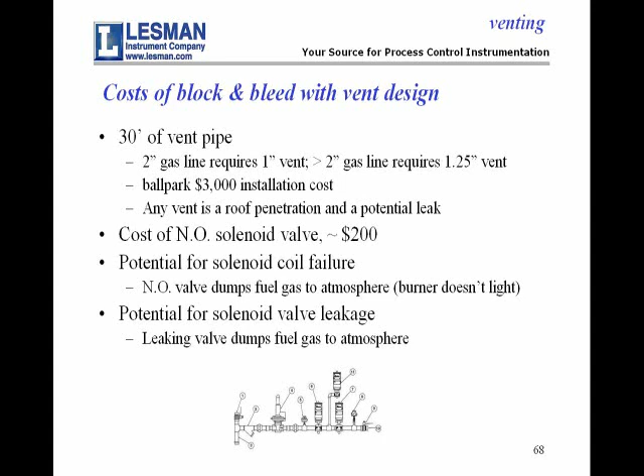You can avoid that by going to something called valve proving. In valve proving, you don't have a vent valve. Instead, you have a pressure switch located between the blocking valves. This pressure switch is activated by a 7800 blue box controller that sequences these blocking valves through a sequence to test whether or not there's bleed down between the valves during this initial fire-up procedure.

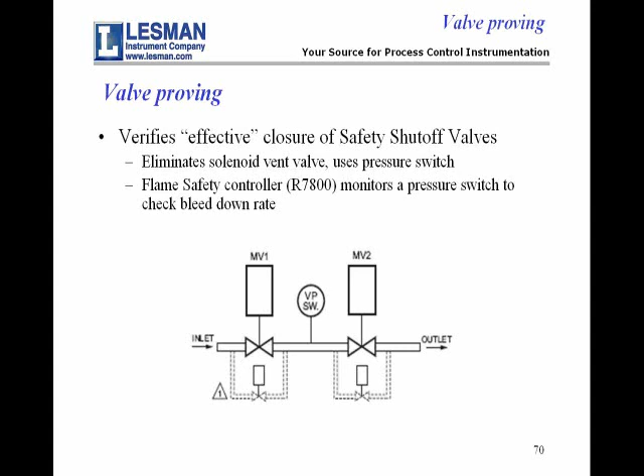I say initial because I think I got another diagram here. There are actually 4 approved test methods for this. One is where before you call for heat and during the purge, you can check for valve proving. You can do it after, both before or after. There's a combination of these things.

People will pick one that applies best to the manner in which they operate. Some people want to come in and fire up the burner and have it on there immediately. Other people say, look, I got a 45-minute purge, it doesn't matter whether I add a 90-second valve proving sequence to that because my purge time is so long. But people can make those kind of decisions when they decide to go to this.

The idea being that when you go to valve proving, you eliminate the potential for this leak. It becomes incorporated into the system so that you're proving every time you fire up that you've got no leak in the safety shutoff valves, which actually is a big deal because it goes along with the fact that people have ignored the requirement for actually looking at and leak testing these safety shutoff valves to make sure they're actually doing what they should do.

Now, if you consider this, you should be aware that there are some code requirements in going to that, and those code requirements are that the safety shutoff valves have to open within a certain period of time in order for valve proving to be valid. Your safety shutoff valves would have to be evaluated to make sure that they actually do that. I know that Honeywell has some much slower valves out there that would not qualify for valve proving if you wanted to consider going to that.

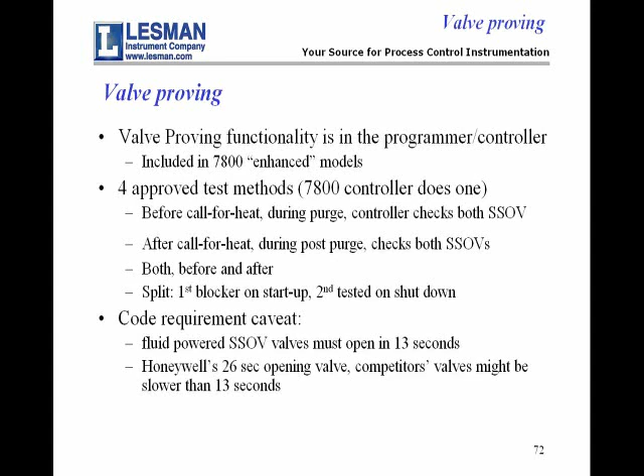In converting to that, it requires a $130 gas switch, and it requires a control that's capable of that. Only the enhanced 7800 controls are capable of valve proving. The old legacy core controls do not. It also mentions on here some of the other requirements that if you were interested in that, we could go through them with you.

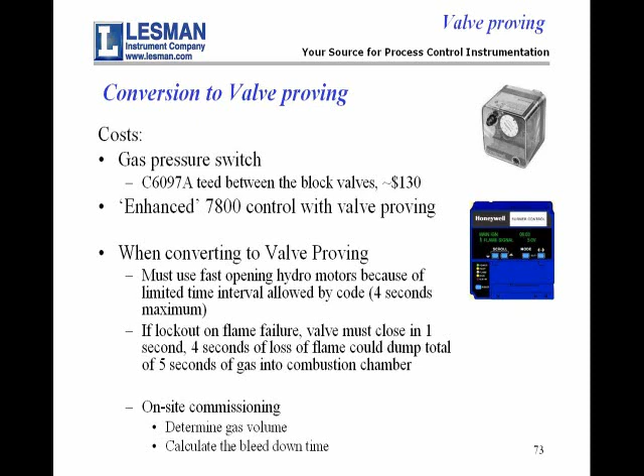I want to run over real quick here Maxon safety shutoff valves. I have to believe if you've got burner trains in your plant there that you have some Maxons in there because they've been the standard for safety shutoff valves for decades. Again, they test their valves at the factory to the Class 6 ANSI shutoff requirements.

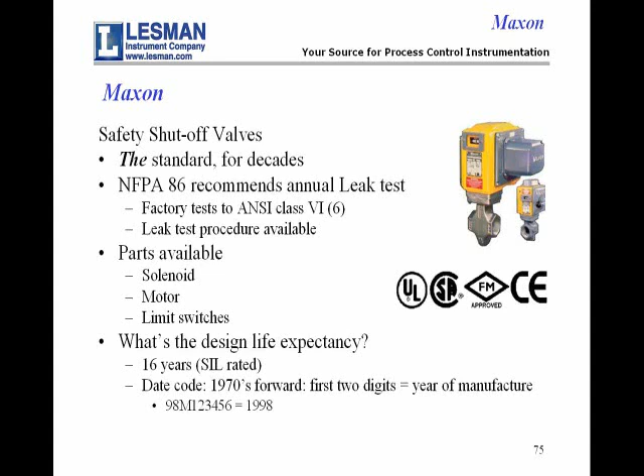Probably the people in the field that I've talked to actually degrade, and they say we'll accept 5 in the field just for ordinary wear and tear. They do have replaceable switches on there, and again, they got about a 10 to 15-year lifespan for life expectancy.

Maxon is also known for their burners. They've got the Kinemax, which goes up to about 8 million BTU with a huge turn down. We find a lot of Kindizers out there up to 75 million BTU with about half the turn down of the Kinemax. And then the Unirads are radiant tube burners.

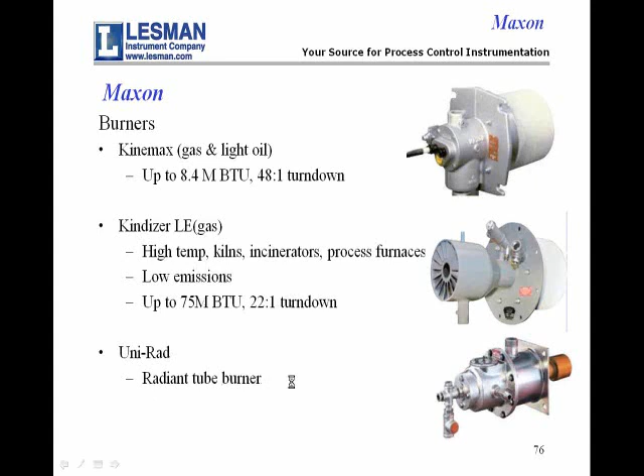On the Unirads that are for these radiant tube burners, there's a lot of competitive units called Eclipse SERs out there. And the Eclipse SER has a commonly known problem to it in that the burner goes in there, and these burners are designed for continuous ignition, and the igniters fail to ignite on these things. The reason is that the metal gets eaten away, and the spark gap becomes too big, and the igniter can't fire across too big a spark gap.

On the center graphic right here, I'm going to show you how the Maxon unit fires all around a 360-degree area right here, and you can actually see the sparks firing here. You'll notice that the sparks go all the way around 360 degrees on a continuous basis. What happens is every time the spark fires, it's going to eat a little tiny bit of metal away, but since this model fires all around 360 degrees instead of at a fixed spot, the erosion is constant around a 360-degree circle, and therefore the burners tend to last forever because you're picking off a little bit of metal here, a little bit of metal there, as opposed to just one point.

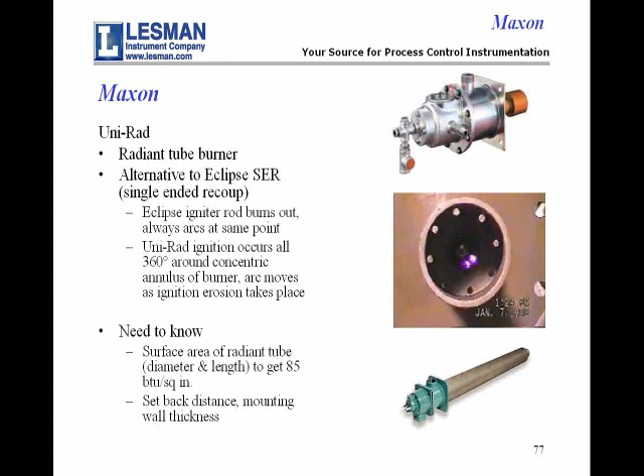If you go to swap these out for Eclipses, there are certain things you got to know, like the surface area and the setback distance and the mounting wall thickness and that kind of thing, but we'd go through that with you.

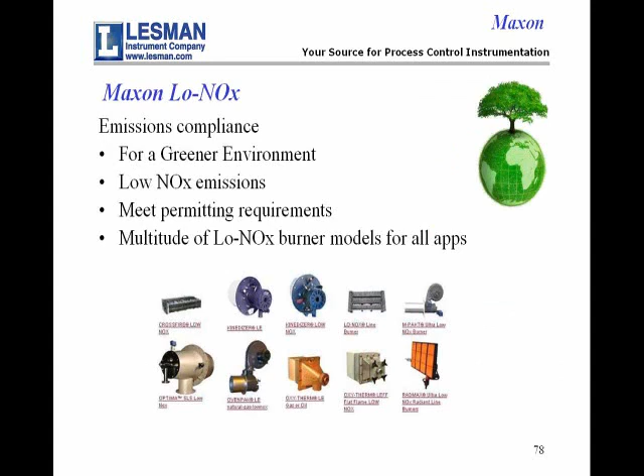Maxon is really known for low NOx. If you've got a mandate out there to produce less NOx from your burners, Maxon has a whole series of burners that can do that for you. Some companies have a big green push and other people don't. It really depends upon sort of a corporate edict.

Maxon is a supplier of a lot of these mechanical ratio devices out there. They've got the Micro-Ratio and the Synchro A, and there are various ways of doing this mechanical type of air ratio flow control that uses screw adjustments over 12 points along the curve in order to ratio the combustion air to the fuel.

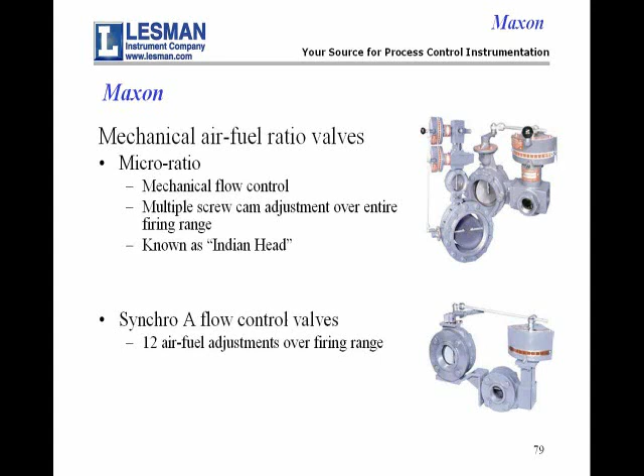Iris is a company that Honeywell purchased recently that excels at multi-fuel flame detection. This is really big where people do a blending of their fuel gases. A lot of times we hear problems like, we have gas, but at some point our process produces hydrogen, and we burn it off here to create heat for our boiler, but whenever we add hydrogen, we have a problem maintaining our flame detection. This is what Iris does.

When you've got multi-fuels, they have scanners that mix IR and UV detection so that you continuously get flame detection depending upon the blend of gases feeding your burners. Their electronic boxes are either full-blown flame safeguard controls, or just a flame detection unit that gives you a 4 to 20 signal out representing flame strength.

ASCO has had for years combustion valves all the way from 3/4 inch up to 3 inch. They've had the standard visual indicators on top for proof of closure. They have actuators that are the solenoid style, the little green solenoids, or the Hydramotors for the higher torque, bigger valves. They've always had the UL, FM, and CSA approvals.

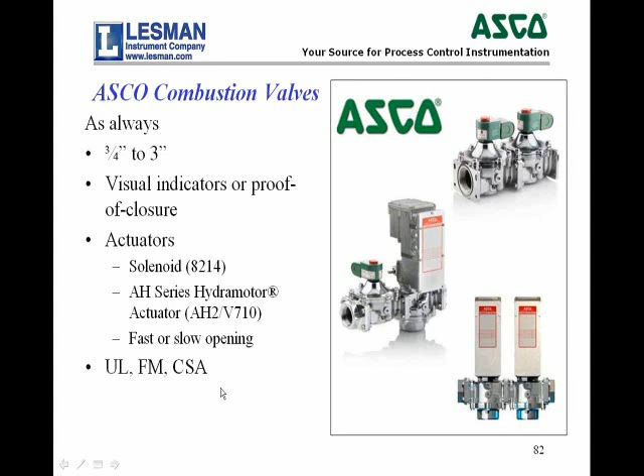They've come out with a new design here, with an inherent flange, because a lot of people want to reduce the size of the valve train. Conventionally they've put unions or nipples between their dual block valves like this. The new style can just mate up to each other, or you can put a pressure switch in here to give you valve proving. You can do this all with flanges to make a much shorter valve train than the old style of plumbing it together with unions and nipples.

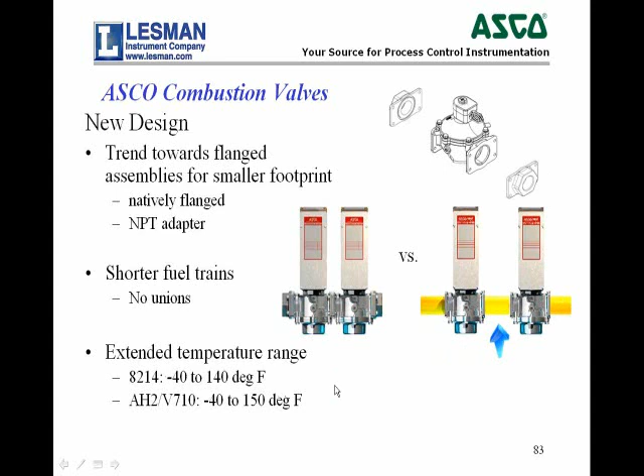So in the new style, they come inherently as flanges, and if you put the adapter kit on there, then you get the NPT on the adapter. The other thing they've done is extended the temperature range, so they all go down to -40 now for people who need really cold outdoor service valves.

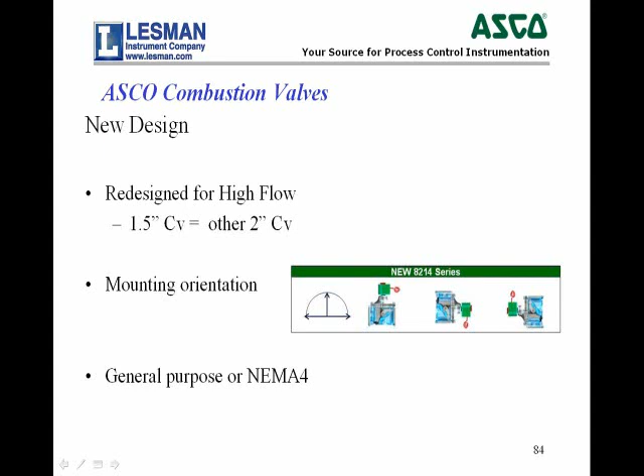The new design also has a higher flow rate. Typically what used to be the 2-inch valve now has a CV down in the 1.5-inch range. The mounting orientation can go roughly 270 degrees, where you can put the actuator straight up, to the right, or to the left—they still don't work inverted all the way at the bottom. You also have a general purpose or NEMA 4 selection depending on where the valve's going to be installed for the environment.